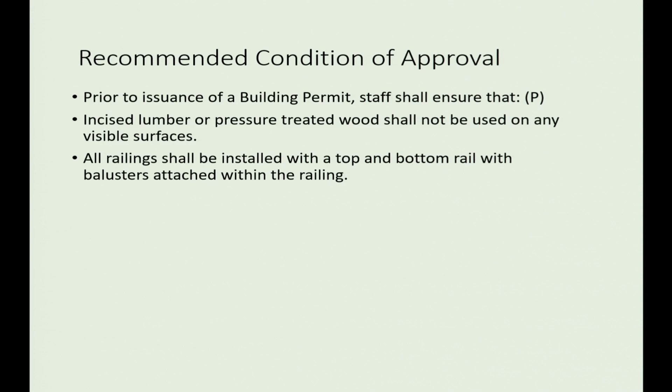And so the only condition of approval that I recommend is just an assurance that there's no pressure-treated wood utilized, and that for the railing on the porch portion, the railing comply with HRB policies, which require a top and bottom rail and the balusters attached on the inside of the railings.

I will add, because if you've been to the site, you have seen that the front porch is under construction as well, that the owner has obtained permits for other work on the house that is separate from this particular project.

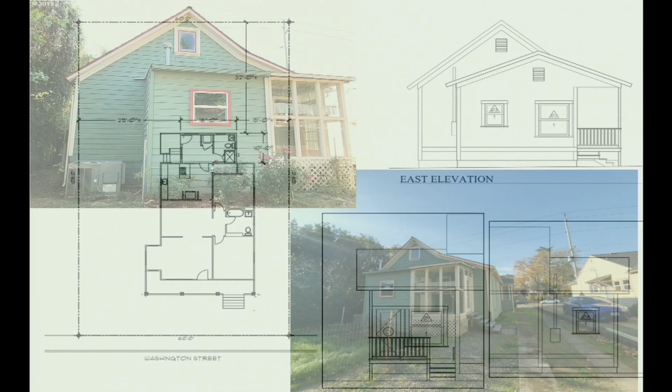The porch was approved by staff as something that meets the HRB policies. So the porch is being rebuilt to resemble this photo with the belly band and these drainage holes in the porch. And so no other changes are proposed other than those, to what it looked like very recently.

The stairs may have an added railing as well, but the columns, the wall height, the siding will all be to match what was there previously and the owners proposed to utilize wood. All the HRB policies have been met for that.

In addition, there's some siding replacement going on up in this gable and in a few other places on the home, and the owner proposed wood siding to match the original, and that was also approved at a staff level. So I just want to clarify that those projects are separate from this review, and they've already been reviewed and approved by staff.

And we do have correspondence that I want to make sure gets entered into the record. It's comments from the McLaughlin Neighborhood Association. They were emailed to you, but then there were also some subsequent emails about the porch work that I want to make sure is in the record and available to you.

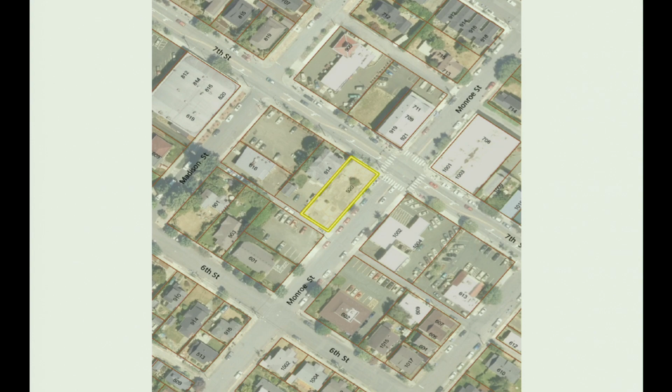This is a continuance of this item from the January meeting. The McLaughlin Neighborhood Association requested a continuance at that hearing, and that was granted. This is 920 7th Street, on the corner of Monroe and 7th. The previous building there was Olson's Pharmacy. For several years the site has been vacant, with just the old foundation and one wall remaining.

And so that's what it looks like today. Neighboring historic designated structures include the church house, which is directly adjacent, and the Far Store, which is across the street. And so that's the church house.

We have a Victorian Queen Anne apartment building nearby. The building that's proposed is built almost to the property lines, rectangular in shape, with commercial space on the ground floor and 13 residential units. There's an existing parking lot behind the building on Monroe Street, across an alley, that's proposed to serve this project.

This project also has to go through site plan design review, which is a staff level review that covers things like parking and landscaping, along with some design standards as well. But the Historic Review Board design guidelines supersede the design standards in the site plan design review.

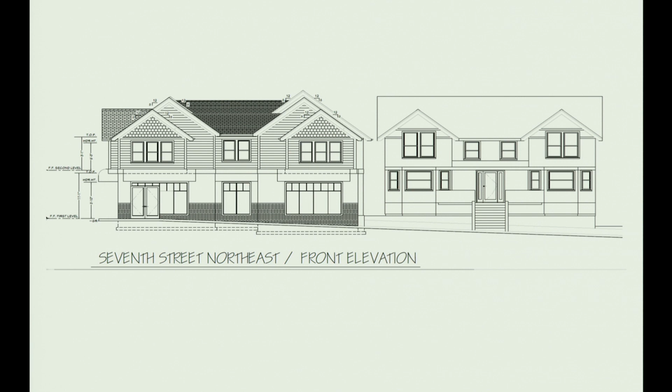This building, with a very similar design, was reviewed in 2014 by the board. So some of the findings and conditions, I looked back at what the board decided on last time. Clearly the project never went past the historic review stage, but I did look back to see what the board decided, and that helped inform some of the conditions of approval this time around.

So we see this thick hidden line - this is the existing property line. We don't necessarily know the relation of the existing building to the property line, but the previous building was clearly away from the property line, and we are not encroaching past what was already established for many, many decades.

What we suggest is that we can move further, about 8 inches, because this wall needs to be removed. By the time we remove the wall, we may not rebuild in the same place - we remove the foundation, or we may keep a portion of the foundation. So therefore, the footprint of the building will stay.

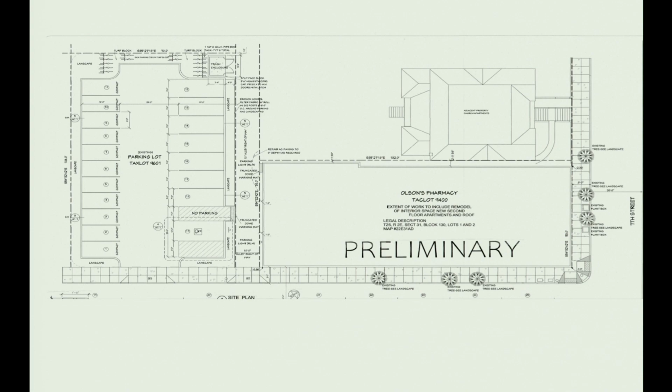Now, if we go to the main floor and upper floor plan, please. So this is the main floor, and as we see on the commercial portion facing the building, there's no windows, no openings. Until we pass the footprint of the existing building, we have windows, but we have proper distance to the property line - 5 feet.

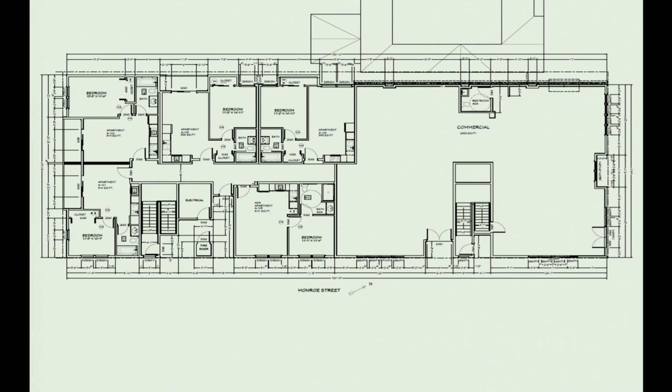What's the second floor again, Kelly? And the second floor is the same. No windows on it. We follow the footprint of the building.

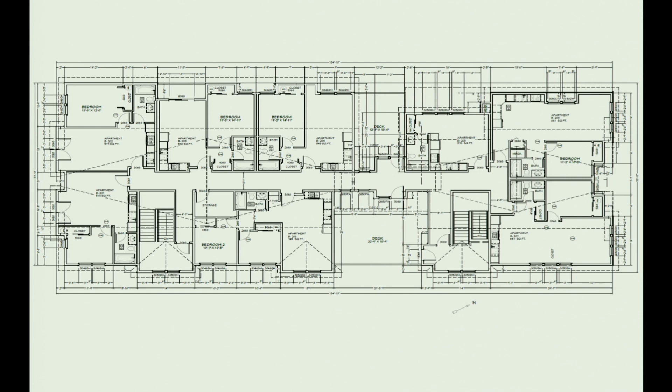Where's the kitchen on the right side? The window in these apartments on the top right corner is set back to avoid complication with the fire code. Going to the next apartment, it steps down further, even further, and then we have the deck, we step even further.

Yeah, 203. No, I hear you. Any questions? Because from that text written and highlighted, I see big confusion, misunderstanding. No, I got you, and I don't see any problem with that, unless I'm wrong.

Anything? No questions. Ray? No. Okay, thank you. There was no public comment on this, unless you want to ask something.

Before that - one thing, it says minor changes to window placement or location on side and rear facades are permitted without additional HRB review. On the east side of the building, that's right along Monroe.

They're very visible. I think they were saying south side - because of this, would it be the south side? Monroe would be the south side, right? The bottom elevation, I think the parking lot is to Monroe, the south. Yeah, so this is along Monroe.

That picture right there, correct? The lower elevation is facing Monroe. This is Monroe, 7th is right here. I'm not sure if south or Seventh is east, but it's Monroe Street. 7th is here, parking lot's there, the church house is in back, correct? And this is the side facing the church house. Yes, this is facing the church, and this is the side facing Monroe. It's very visible, and so changes to window placement or location on the side and rear facades are permitted without additional HRB review.

The ones on the west side still show windows. This is where the church building is, this is that first apartment where they step in. No, it's right here - this is the first window that steps in, and then this is the next apartment that steps further back because here's the church building, and this steps back for the required setback. Got it, turn around - and then this steps back even further, so that the setbacks and separation are created on the second floor.

So it's just along where the church building is that there cannot be windows, correct? You can have the windows, but they're stepped back so they don't need to do fire rating - they're solid down here. Right, okay, all right.

But the ones on the side, if they're changed - and the major word there is minor - because if it's just moved a little... but that's such a highly visible side, we don't want to change it too much. I bet they won't, given how the windows are situated. There's not a lot there, so I just wanted to make sure.

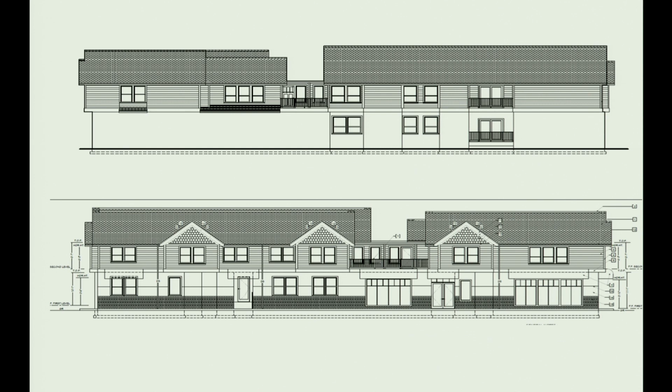I think that's it, is that it? I do believe, yes, okay, no more notes. Thank you. Well, I would like to address the other questions and points of concern, if I can. You can, but the board has no other questions for you.

Okay, on this item, how about the bay windows or any other concerns? I don't know if we have any other concerns, everything seems nice. No, I think we're good. Thank you, okay, thank you.

And if I'm looking correctly, there are no public comments on this item. Other than the ones that were sent - no, we don't have any on this one. Well, I don't have any public comments. Oh, okay, but there's McLoughlin. So if that's the case, I'm going to close the public hearing, and we can deliberate, discuss, do whatever.

No, you're great, no it's awesome. Check and balance.

Staff recommendation is for approval subject to the list of conditions that we're looking at.

Can we go back, please? Why am I not - oh here we go. Back to the conditions, I guess I go this way - that's the conditions, page 2, the one with the highlighting on it. 3B - oh, that's on Kelly's copy. Oh yeah, which we were just looking at. Maybe we can get that back up again. No, this thing doesn't like - oh, there. And here's the number, there we go. Yes.

So that list of items, you might want to say if you agree or disagree with it. The second bullet is asking for a better explanation from the applicant regarding the appropriateness of the proposed design, or changes to the design which would meet the design guidelines. So if you want to provide a little more direction to the applicant, that might be helpful. But otherwise, you can feel free to do what you'd like.

Well, there's the option of bypassing all of it and just making that motion and being done. Sure. And I don't know what the board wants to do. I looked at it, I thought it was, anyway.

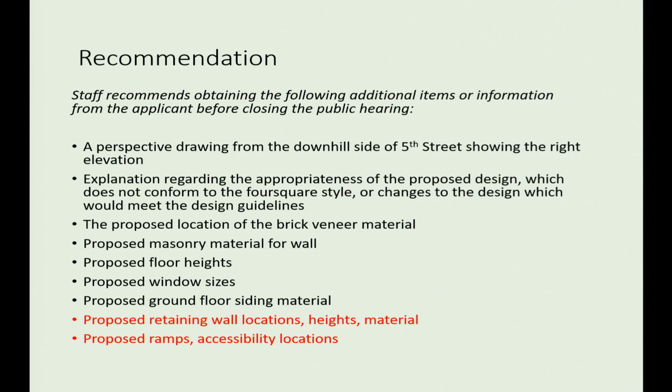I'm just kind of questioning how it got to this point where we're having to talk about it because it is very incomplete. The applicant has the option, if it's been deemed incomplete, to say, here's what I'm providing to you, and I am telling you to deem it complete with what I've provided. I'm not providing any more. And that's what happened in this case. So we went ahead and deemed it complete and put it on the agenda because we were told this is what I'm providing and nothing more. Got you.

Does anybody on the board have a comment about this, Grant? Do we have public comment forms for this? There is, but that's my question: if we go straight to continuance, that obviates all of that and we move on. I'm in favor of being brief, but if people made time in their schedule to make it to the meeting, I'd prefer to give them the opportunity to speak.

And then we asked specifically about some guidelines, some samples, how to put this thing together, two different things. No recommendations, no guidelines, no sample to follow. So we have a totally different scope of work and project, dictated not by ourselves, by myself or the owner, but by the city, that it must be not residential, it must be mixed use. So mixed use, the owner wants 2-story. And 2-story is fine for four square, no problem, especially on the flat lot. But we have to have a commercial space.

And the first design approach was the commercial could be on the back of the property. The final recommendation was the commercial space, 900 square feet, the studio has to face the street, has to be on the front. On the lot that is sloping from left to right, as you see this hidden line, how do you do this? So we put this studio at the ground level, we had to dig into the soil. We have a situation where not only does the city require different things, historical review, different things, but we have the sloping situation, the difficult lot and geotechnical situation. So how this is put together, we end up with 1 story of commercial and 2 story of residential.

My question to the board is, is that going to work? Because 1 + 2 is 3, not 2, not 2.5, and we have a simple problem: how to put this thing together.

If it is zoned to residential, fine, we will do 2 story. No height restriction, fine, we have no problem. About the height restriction, one of the points says not more than 28 feet or 30 feet.

Okay, thank you. All right. So what is, I don't know, what is a foster home rated as? Is that residential or is that commercial?

I don't think it's relevant. It's not - use questions are not relevant to what you all need to do. You're looking at what's on your right, your purview, and the fact that a lot of it's incomplete. I think the applicant needs some guidance about what is appropriate massing.

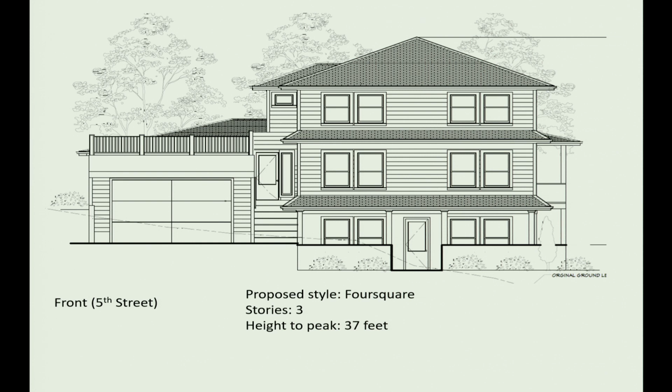And whether you want to do that tonight or wait - that could be a design guideline situation, that could be design advice, but that's not what this is.

I appreciate that. So that's where - there seems to be some confusion or misunderstanding regarding what mixed-use zoning requires. It's dependent - it allows either or use. It doesn't require both. Am I right?

There's one exception to that, and that is single-family dwellings are not permitted on their own in the mixed-use zone.

Residential care facilities are a permitted use. What we've been told is that it's a single-family use with commercial space, which is okay in the mixed-use zone if it's paired together, but on its own, a single-family use is not permitted. But it's the commercial space that pushed it up to 3 stories.

What the applicant said - I think what I'm seeing is the onus needs to be on the applicant to figure this out, not on the city. I see the applicant needing to make decisions and deal with this, not being dependent on the city. But I'm just seeing that it's an incomplete application and that it's far from coming before us to even get to that point.

So they have a 20 by 20 structure proposed, facing the street, with the garage door facing the street, and we have a 20-foot setback requirement for garages from the public right-of-way, yet the property's only 35 feet wide. So clearly they need an exception to setback somewhere, but they haven't requested that. So they're going to have to tell us what they're requesting, give us a site plan, and then come back to a later meeting.

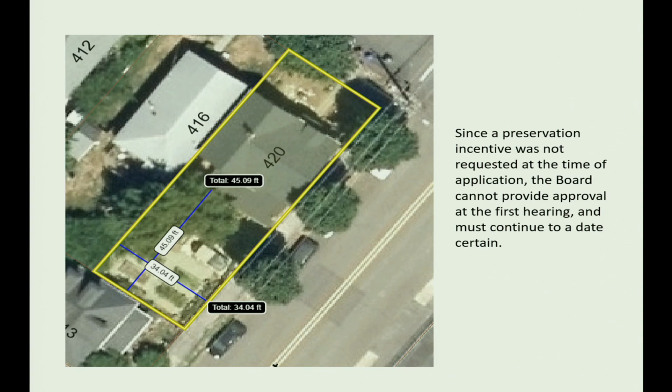Sure, I have a question. In reading through that, it said there had been another garage on the property that was demolished. Yeah, this little one, it's gone. But wasn't there a curb cut? Because you're talking about doing a new curb cut? Yeah, no, getting rid of that, I can't see that there was a curb cut for that garage.

Yeah, it's like, I think it was more of a shed. Shed or a shop. Oh, okay, because I was just like... Right, yeah, if you're putting another garage where one was, where's the curb cut? Right, this is kind of incomplete, okay, a little bit, on a lot of things.

So I would move to continue HR 2005 to a later date certain, which is March 24th. If somebody wants to second that. I'll second. Can we have a vote?

Board Member Stobie, aye. Board Member Met, aye. Board Member Basinger, aye. Board Member Blythe, aye. And Chair McLaughlin, aye.

Our next item is 3E, HR 2004, Historic Review Board review of a new single-family home and detached garage in the Canemah National Register Historic District on 4th Avenue. Does any commissioner have any ex parte contacts, conflict of interest, bias, or any other statements to declare? No. Nope. No. I do.

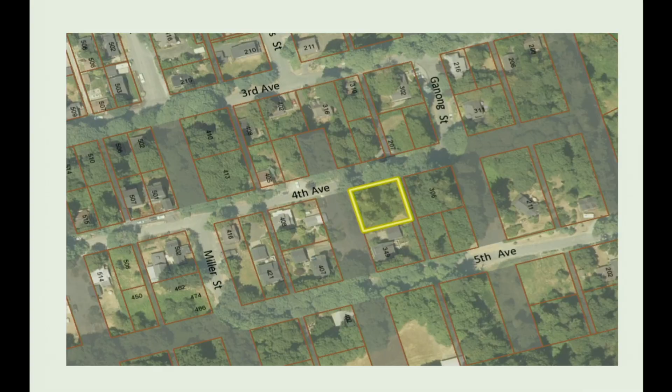You recently approved a new bungalow on the neighboring lot at 306 4th Avenue, separated by a 12-foot alley from this property. This property is also in the geologic hazard overlay, natural resource overlay, and the Willamette River Greenway, and the applicant has applied for review of those, submitted an application, but it's not complete at this time. Those have been submitted though.

So there's a view of the property from 4th Avenue. There's a historic basalt retaining wall that partially fronts the property within the 4th Avenue right-of-way, visible in that photo. The neighboring properties on the left side are contributing historic homes: 207 4th Avenue across the street, 211 5th up the hill, and 408 4th on the same side of Fourth, on the other side of Hedges. Then there are non-designated newer construction homes at 311 Ganong and 349 Fifth Avenue, just in between this property and Fifth.

The house is proposed to face Fourth Avenue, with the detached garage in the back corner of the property and the driveway coming off the Hedges right-of-way. The applicant has chosen a bungalow style. The size of the home is just about 3,200 square feet, not including basement space, which wasn't provided. The detached garage is 550 square feet with a 400 square foot upper level labeled as unfinished attic but with future potential use. The width of the home is 46.5 feet, and the height from the bottom base level is 32 feet, but from the main floor it's 25.5 feet.

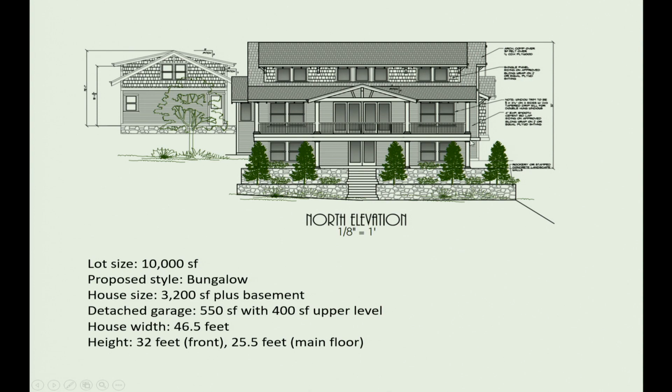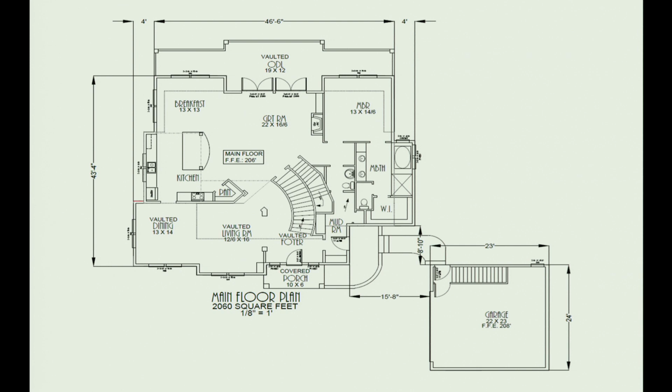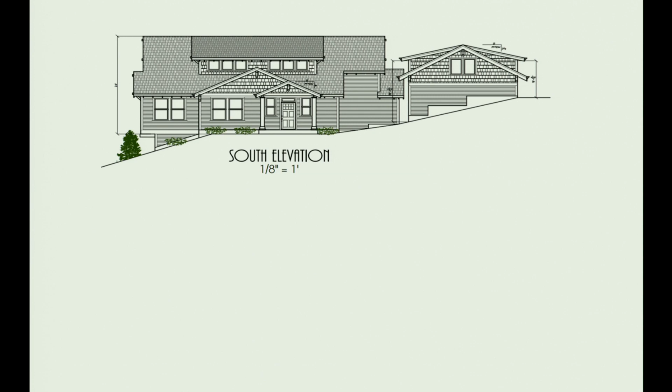So I'll go straight to the main issue here, which is the width and overall size of the home. The design guidelines say that homes need to be in proportion and shouldn't go outside the range of historic home dimensions and sizes. With a width of 46 feet, this is well outside the historic bungalow widths. Even when you look at newer bungalows built in Canemah, under today's guidelines and the old design guidelines, those range generally between 30 and 36 or 37 feet wide. So 46 feet is significantly wider for a bungalow. The depth is within range, but the overall footprint is on the upper end and slightly exceeding the range of the historic homes.

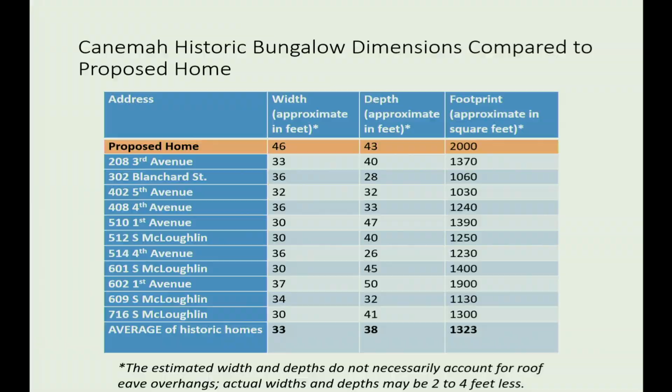My recommendation is really to continue and allow the applicant time to resolve the size, massing, and width issue. But I just wanted to highlight a couple other things.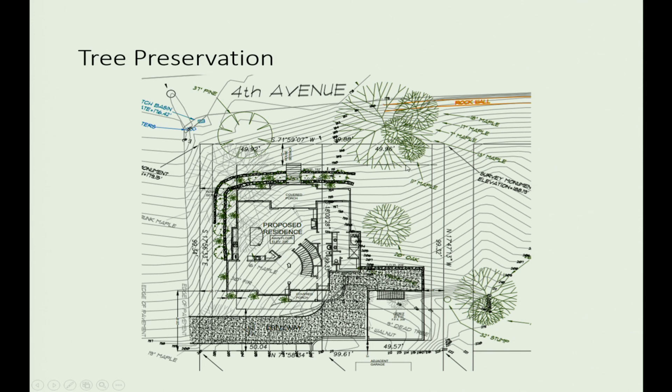Because of the topography and the overall size of the house, there's quite a bit of tree removal proposed. You can see there are 4 trees in the right-of-way proposed to remain, and 2 trees on the property proposed to remain. That includes this tree here in the right-of-way, and then this one.

It was labeled as an oak. It might actually be a maple. I'm not sure, it's hard to tell in the wintertime when there aren't any leaves. I bet it's an alder. But yeah, they're covered in ivy on the trunks.

Because of what we know about construction practices, I do recommend a condition of approval that the applicant have an arborist assess the trees selected for preservation, and make recommendations on how to really protect those during construction, since so many other trees are proposed to be removed. The ones that will be preserved need to really be preserved properly, so an arborist recommendation should be followed.

And if the arborist looks at it and says this tree is not likely to survive construction, then I would recommend that the applicant make changes and come back and figure something else out, so that even more trees aren't removed on this lot.

This is the list of trees proposed to be removed. There are, I think, 2 additional trees on the property not identified on the site plan that appear, so I don't know if those are proposed to be removed or not, but they're not shown as being preserved.

The reason for my recommendation is that the design guidelines call for minimization of tree removal by adjusting house siting and replanting to preserve tree canopy. The guidelines also say clear cutting of lots is not allowed. The applicant is preserving some trees, so I don't think we can necessarily call this a clear cut, but I wanted to bring this up.

If you want us to do a continuance, would that be part of it? Is it having the arborist look at the tree and have them come back? You could, but I think it would work as a condition of approval as well. The condition would be that they come back to the HRB if it's looking like they can't preserve these trees. Gotcha, that could be something the board asks for before the next hearing.

The other things I want to touch on are the entryway design and basement level. I've recommended conditions that I think could work without requiring these things to be corrected outright. I don't think the width issue and overall massing and size could be solved through conditions, which is why I haven't recommended any there. But for the entryway, the 4 doors, the overall width, the lack of a stair to the porch, I think that can all be handled through conditions of approval, so I've written those in. But again, if the design changes, those conditions are subject to change as well.

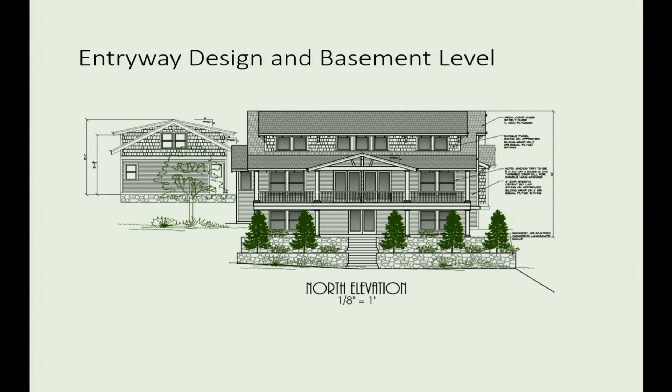So you're recommending a continuance? Same thing as before. If that's the case, we can make that motion and choose not to hear from people. Or we do like we did in the other one and give these people 3 minutes each, knowing that we're going to do a continuance like before. I think that's good because then the applicant can hear what some of the concerns are.